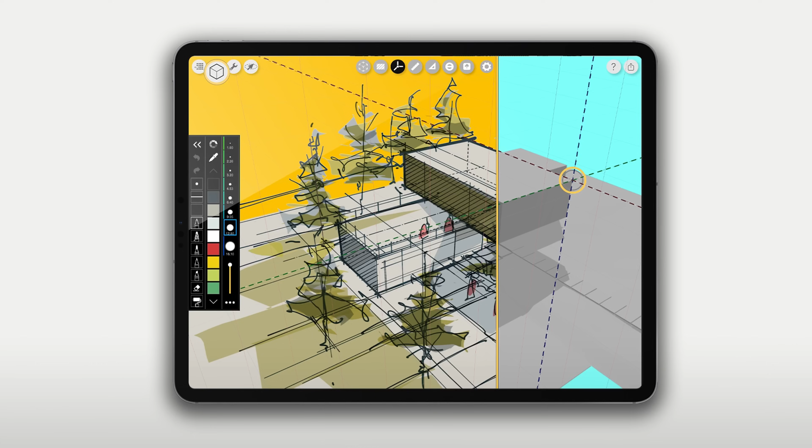Have you ever wished that you could have a live 3D model inside your sketchbook? And that it would automatically generate perspective lines for you? And that you could fly between any view you want?

Well, now you can. Whether you're an architect, interior designer, landscape architect, or industrial designer, Trace gives you limitless views to sketch over.

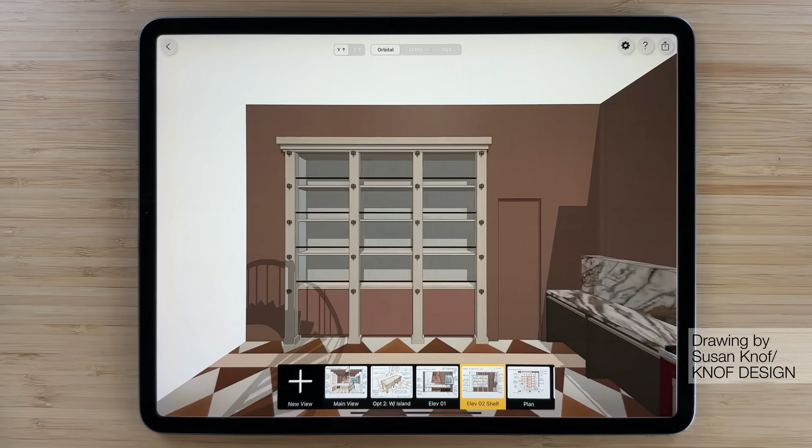Sketching on 3D models is perfect for creating floor plans, exterior perspectives, elevations, diagrams, sections, landscape planting plans, markups, axons, interior perspectives, details, and so much more. Let's check it out.

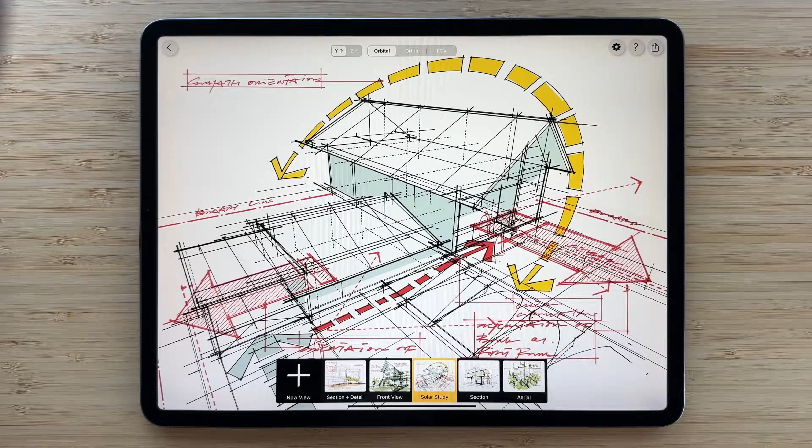To begin, tap the plus button to start a new project and select 3D model. You can bring in files from your favorite 3D model software including Revit, Vectorworks, SketchUp, AutoCAD, Rhino, and more. Just export an OBJ or USDZ file.

Then, navigate to your file in your cloud storage of choice. When you select it, a new Trace project will be created with your 3D model inside.

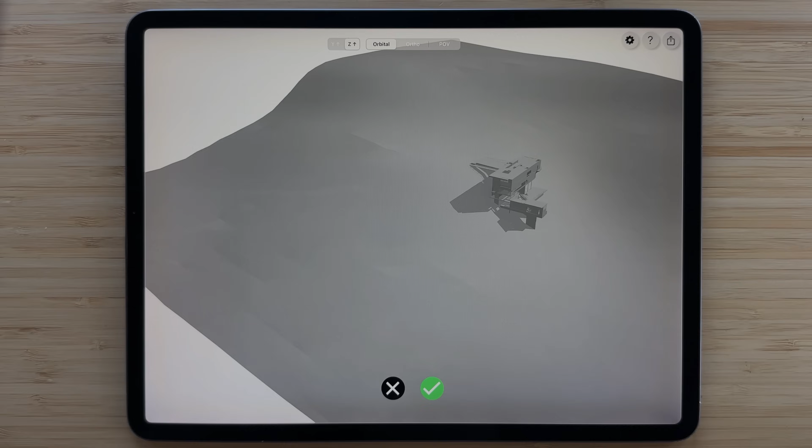Now it's time to frame your view to sketch over. Use natural gestures to orbit, zoom, and pan. Switch your view mode to ortho for top and side views to draw scaled plans, elevations, or sections.

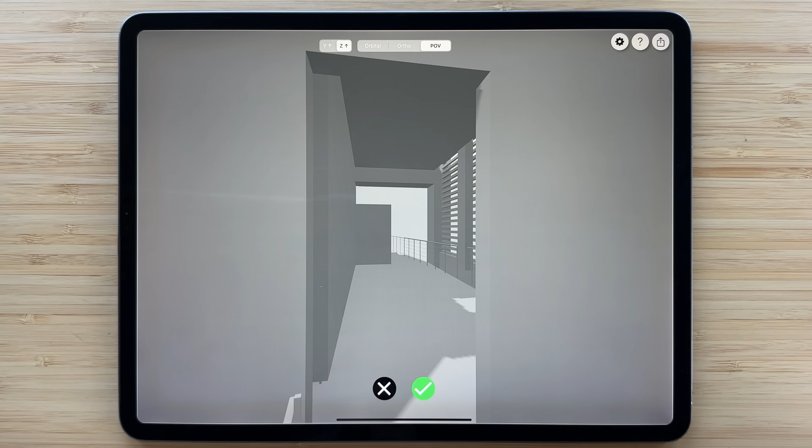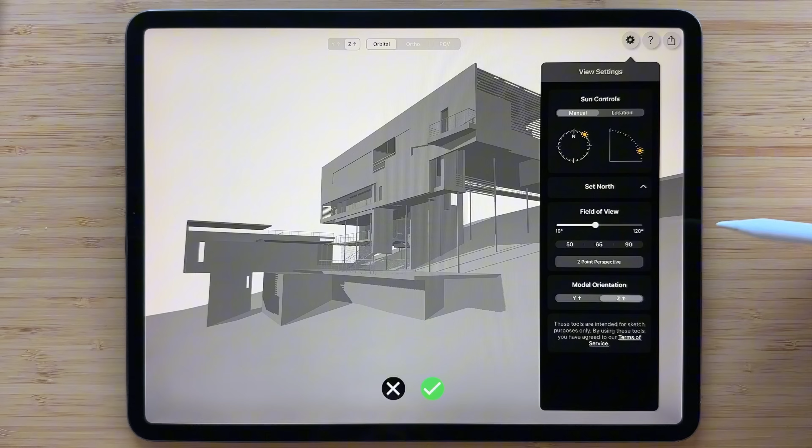Use POV to dive into the interior spaces. You can more precisely control your position, and when you pan with one finger, it's like rotating your head rather than orbiting the scene. For perspectives, you can turn on the 2-point perspective lock to make sure your vertical edges are truly vertical. In settings, you can also adjust your field of view.

Use the higher numbers to widen your frame, or slide down to 10 degrees for a near axonometric telephoto view.

Here's where things jump to the next level. In Trace, you can also get precise shadows to sketch with. Shadow Maker uses real sun coordinates using the sun position algorithm developed by the Alliance for Sustainable Energy, letting you design with hyper-accurate light and shade for any time and place.

If you want a quick setup, you can use these sliders to explore different sun angles. For greater precision, you can adjust the north direction of your model manually or input a specific angle. Then, set your project location by inputting an address or just panning to the area where your project is.

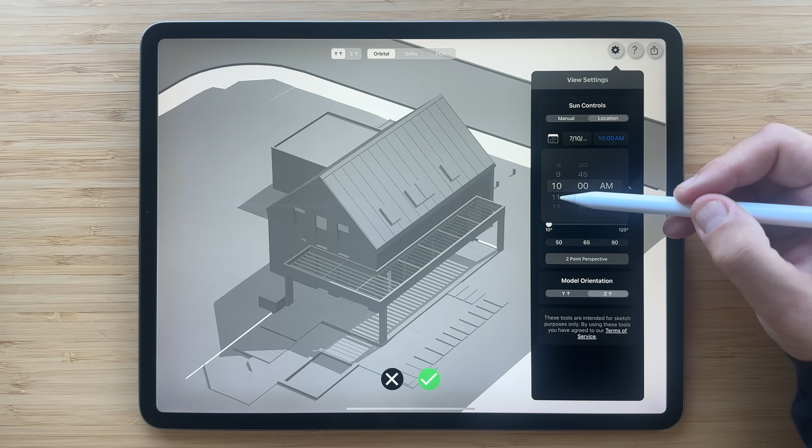You can even set the exact date and time to see exactly how the shadows will change throughout the day. This amazing tool lets you see precisely where the morning light will enter the kitchen, or how your courtyard will be shaded throughout the day.

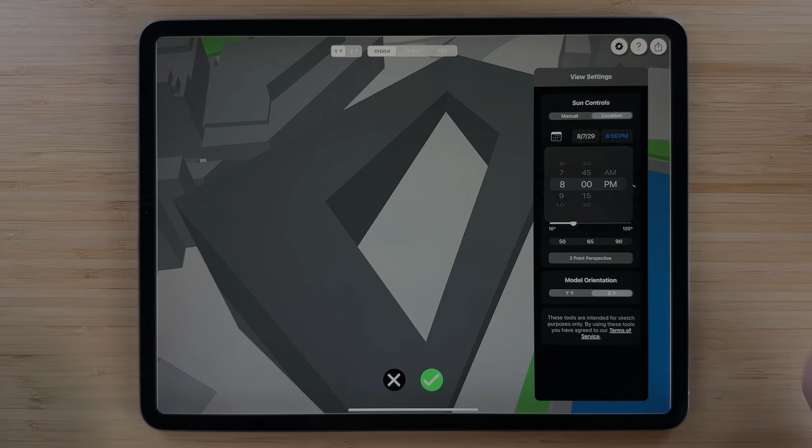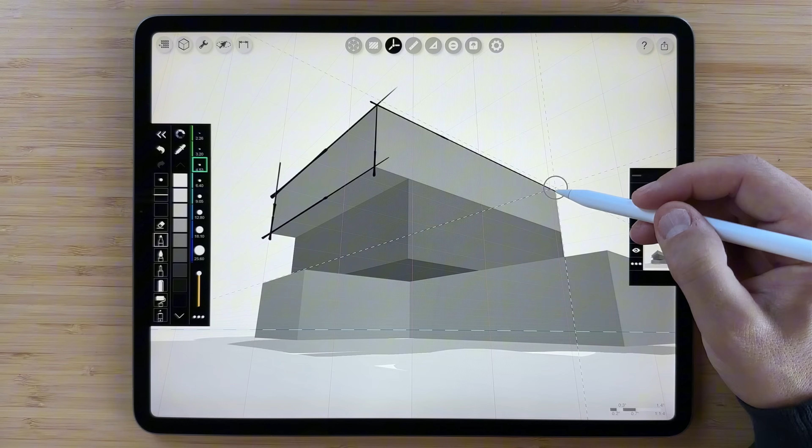Once your view is locked in, tap the back button to start sketching. For perspective views, Trace sets up an auto-generated perspective grid for you, including vanishing points and a drawing guide that will help you draw beautiful perspectives that perfectly align with your view. You can also turn off this guide in your settings, and your lines will still snap to the perfect perspective.

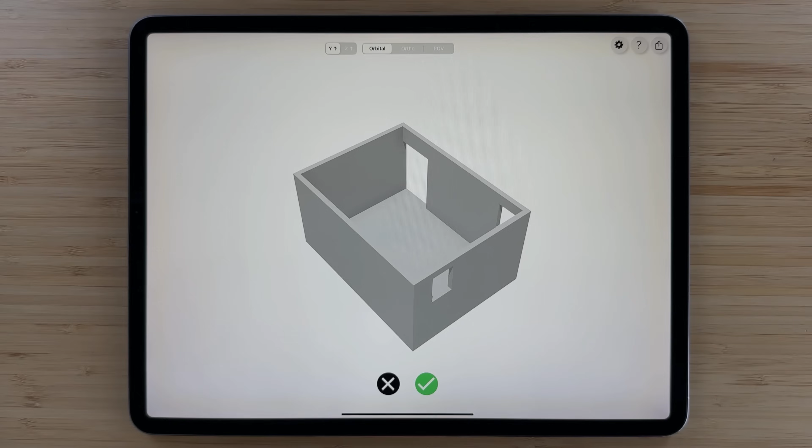These tools make it so easy to make beautiful drawings. For plans, elevations, and sections using ortho mode, if your model isn't automatically scaled, you can easily set it up. Just tap Set Scale in the wrench, move the crosshairs to a known dimension, and input the measurement.

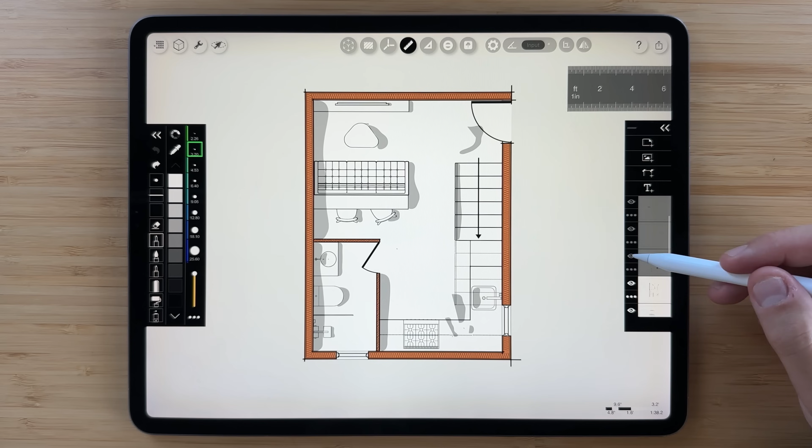When you turn on your ruler, you'll see your entire view is precisely calibrated. This helps draw scaled floor plans over a 3D model with confidence and accuracy. It's so easy to draw over your 3D model from perspectives to plans and beyond.

When you finish your drawing, tap the cube icon here to return to your 3D model. If you want to add more views to sketch over, just tap New View and then Set a New View.

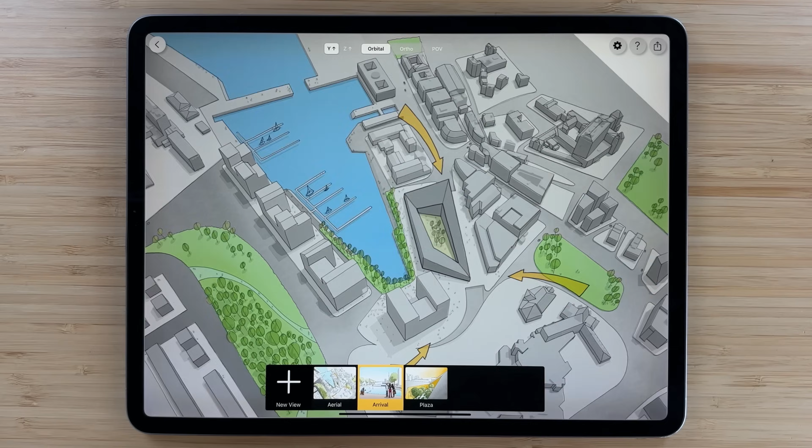Now, here's the really fun part. Simply tap any preview and your view will fly to that drawing. This is one of the most incredible ways to present your work to a client or teammate. You can see how you can make all of these different drawings right on top of the same 3D model.

Fly through an interior model from perspectives to elevations to a floor plan. Or fly through a house model from a diagram to section to perspective.

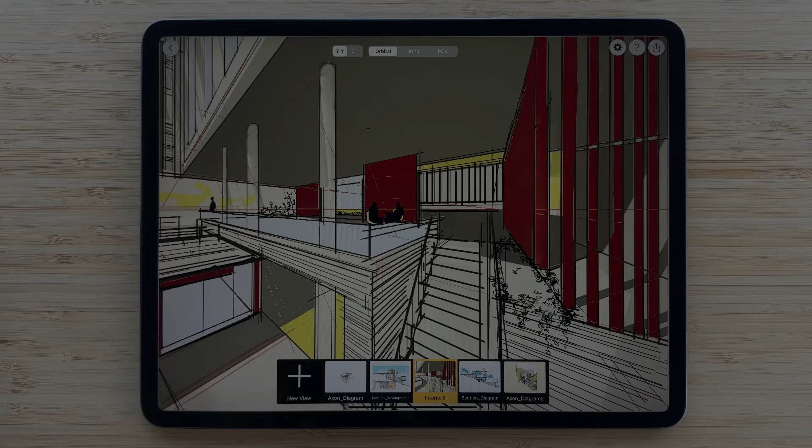Once your sketches are done, you're ready to export. From the 3D model viewer, you can export all your drawings as a single PDF drawing set to email out. You can also share the whole working project file, including the 3D model and all the layers in each drawing, so a collaborator can keep adding to your drawings.

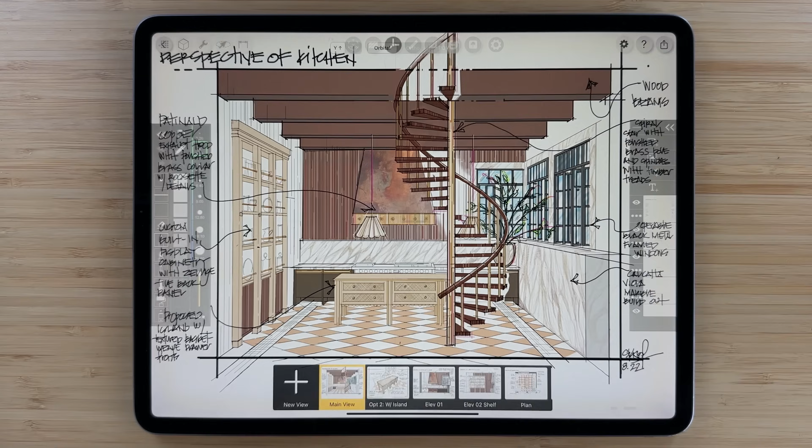If you open a single drawing, you have a few more options. From here, you can export as a PDF, image, Photoshop file, or even as vector line work so you can continue working on your design in your favorite CAD software like Vectorworks, SketchUp, AutoCAD, Revit, and more.

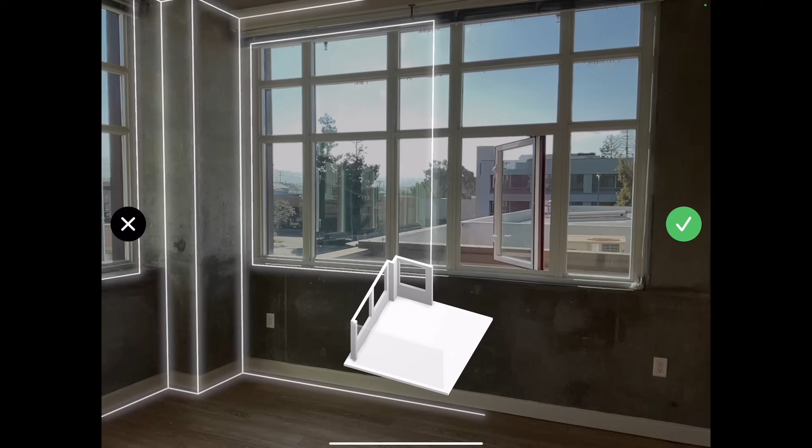If you don't have a 3D model yet, don't worry, you can generate one. Use the AI Room Scanner in Trace to scan your space to create a scaled 3D model, set infinite views, and then sketch right on top of it. Go from real space to sketch ready in seconds.

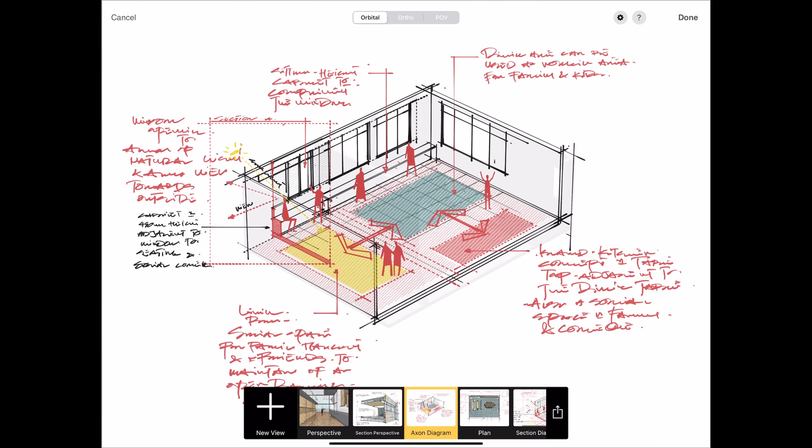Sketching on 3D models is perfect for architects, interior designers, landscape architects, and product designers. We can't wait to see what you draw on top of your 3D models, so tag us when you share your work so we can feature it.